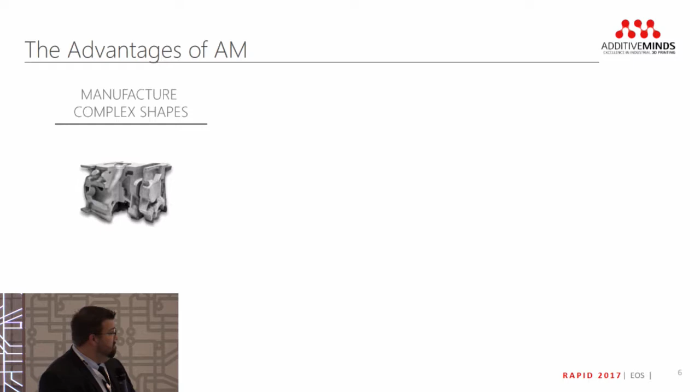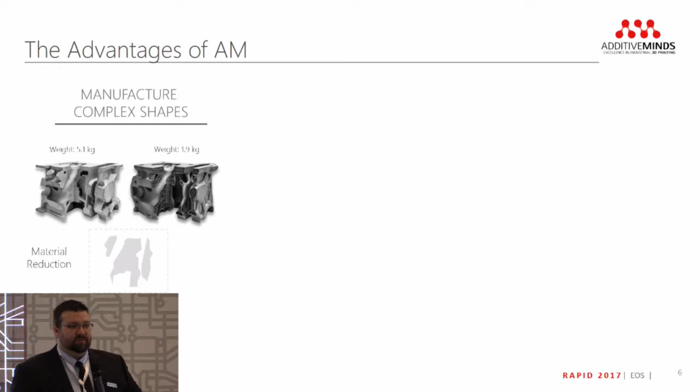So briefly, we'll highlight the advantages of AM. Nowadays most people know what it is, especially if you're at this conference. But additive manufacturing allows you to make or manufacture complex parts, things with intricate geometries that are more difficult to machine. You can actually use more difficult to machine materials, things like titanium and Inconel, things that would run down the tools on your subtractive machines.

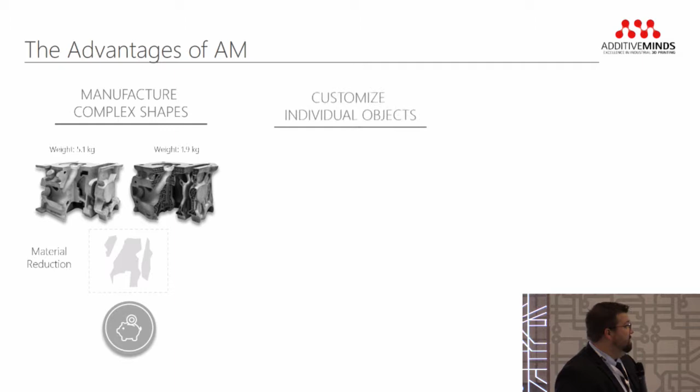Customize individual objects—you can put multiple different types of parts on one machine, build them at the same time. There's no different setup or anything like that. Part A is set up the same way as part B. Put it through your computer system, slice it, print it.

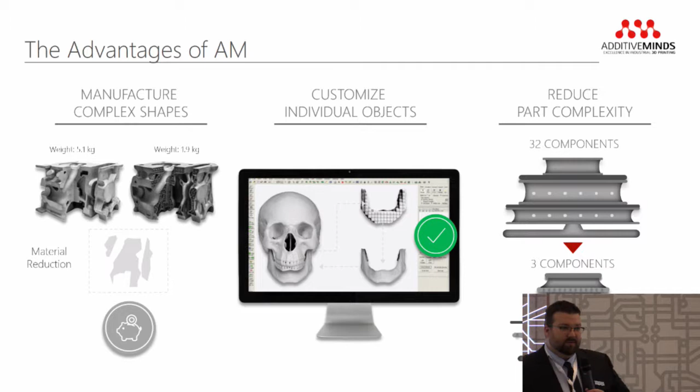And just like the GE fuel nozzle, you can reduce complexity. Things that used to be 30-some parts can now be reduced into 3 components, put together. They're stronger, they tend to work better, they reduce the weight, and are easier to manufacture.

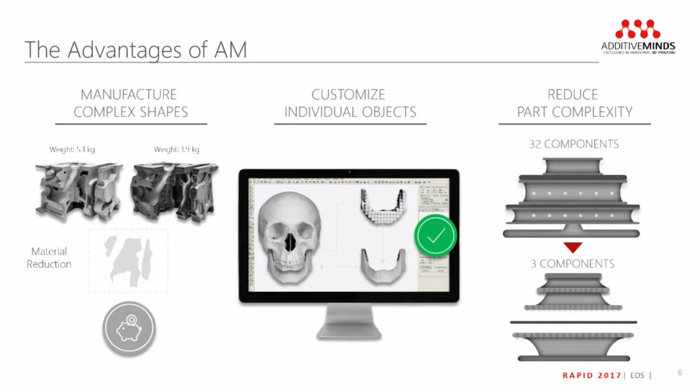So again, why are we all here? Why are we all doing this? This is a typical timeline for a subtractive part. You do some prototyping, maybe you got to set up tooling—that can take months depending on the part complexity. Then you got to remove the material, so cut it away. Post-processing if needed, heat treatment, polishing, all that. And then finally, you have to assemble it into its piece.

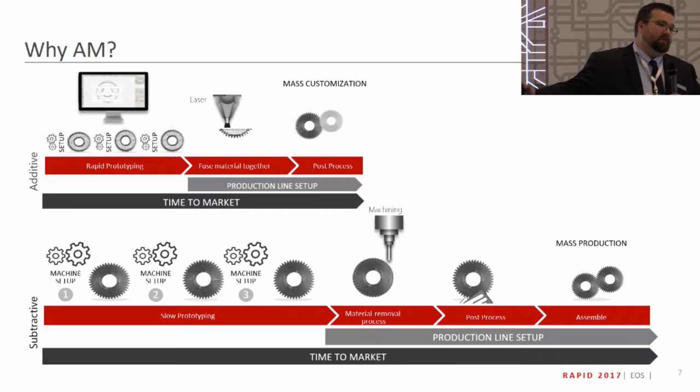Additive is very quick. You can try different designs, different prototypes immediately, and then move right to production. Post-processing can happen pretty much simultaneously. If you have a part that you want to change the design, there's no month-long time to set up tooling to do all that—you can do it right away.

Freeing up your supply chain.

What this is trying to show is that with many of your subtractive equipment, it's a long setup time to do that one specific part. So if you want to change that part, put different numbers on it, make a new through hole or bore, or different surface finish, you have to reset up that entire job. With additive, I can build different parts on the same build. So if I want to do an experiment, a DOE, I can throw all those builds on the same build plate, look at them, figure out which is the best one, move on to production from then.

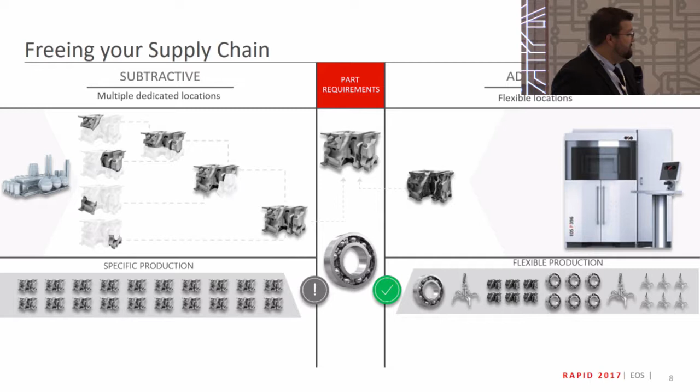As you can see, the one on the left is just one part over and over again, whereas with additive, we can do multiple different parts on the same job, no problem.

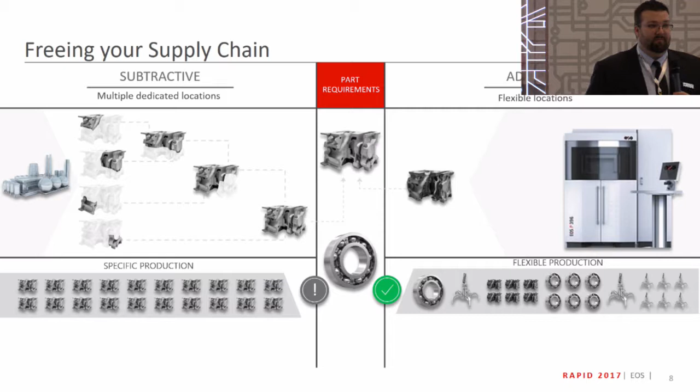So what's this all about? People say they want better technology. AM's all about technology - we can make better parts, better lasers, better machines, better materials - but none of that means anything unless we, as an industry, have a need to drive applications that are going to drive this market forward. So whereas technology is about technology, the transformation is about us, the people, customers. We have to find new ways to use this technology, find new applications that this is good for. And that's kind of where we are trying to come in.

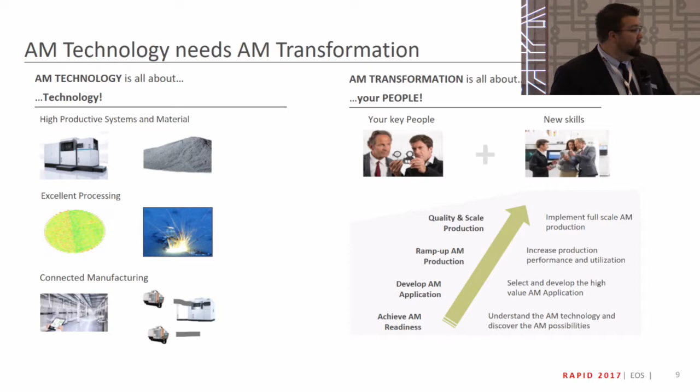What we try to do, the Additive Minds group, it's been going on in Germany for about a year now. We've now moved it on to North America, so there's about 8 or 9 of us here in the US that are part of that group. And we offer things like a customer academy to help train you, if you're a customer of the EOS technology, how to be, we'll call it an expert, but I hate that word, a more advanced user. Things like consulting, we can come help you.

So let's say you have a great idea, but you're not sure how to implement it, we can come help you do that. And then finally, we have innovation centers. So if you have great ideas, but you don't want to build them yourself, we can connect you with partners that can help you build them.

This is all about if you want to have a great company, you need to have great people. So you can have the best machine possible, but if the guy that's running it doesn't know how to run it, it doesn't really matter.

Customer Academy - this is a list of the different kinds of trainings that we offer. Things like, on the bottom there, the innovation with 3D printing is just to get people to learn what 3D printing actually is and how we're using it today. Part screening and selection - what parts are good for AM, what parts aren't.

If you're just CNCing a block, it's not going to be faster for you to do that additively - it's not a great idea. However, if your block has a bunch of conformal cooling tubes in it, maybe that's a good application for additive manufacturing. Design for AM - so taking your existing parts and designing them through the AM process. Parameter editor - that's changing the parameters with the EOS technology. Cost per part optimization, lattice structures, and melt pool monitoring - that's further on the road there.

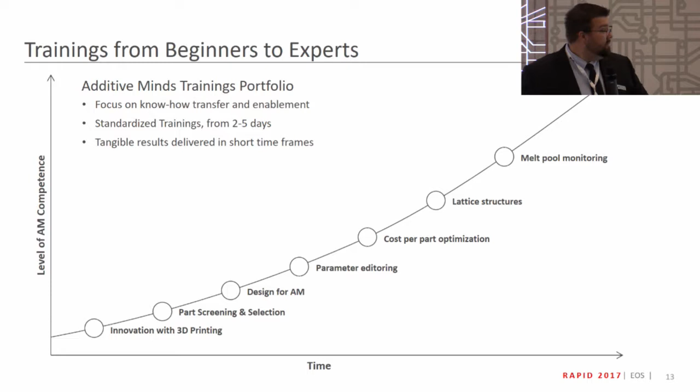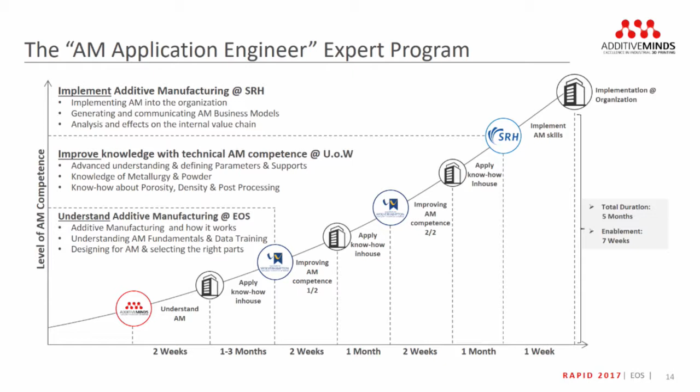The AM Application Engineer Program - this is something that is exclusive in Germany right now. We're working on setting one up here in North America. But we've partnered with the University of Wolverhampton, and basically what we do working with them is we can send one of your engineers to that facility and they just get full immersion additive manufacturing.

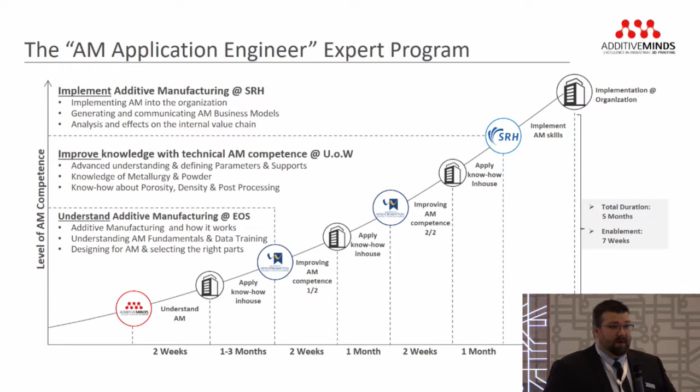It's kind of like learning a foreign language - the best thing to do is drop yourself off somewhere and just learn it. Same thing here, so we try to help you bring up the competence of people running the system so you can run it more effectively. It's a big investment to buy the machine. You want to make sure you're running it right away.

Consulting. Someone like myself or someone from our team can come help you out. You have a great application, but you're not sure how to implement it for additive manufacturing. We'd be happy to help you.

Things like part screening, 360 assessment, so how to set up your lab to be more efficient in additive. Operational qualification, making sure that your operators are qualified to do what they're doing, following the safety steps, making sure materials are handled properly. And additive manufacturing qualification, AMQ.

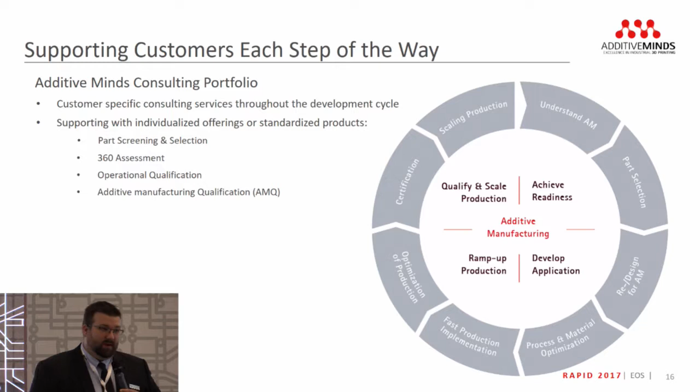This is something we have with Incodema3D out of Ithaca. We basically went in and qualified them to be a service provider, if you will, for other people. So if people come to us saying, can you build us some of these parts? We want to try this out. We help them make those parts.

Innovation centers, these are like our home offices. Places like Novi, Michigan is one, Pflugerville, just outside of Austin, Texas is another. The home base, the mothership, is in Krailling, Germany, just south of Munich.

Those are the sites, and it's not just our sites. We have customer sites that are going to be set up as innovation centers as well. Incodema might be one, and I think Precision ADM is set to be another one. So again, just more places for people to come see the technology, so you don't have to travel all the way to Germany to come see our technology. It's very, very inefficient.

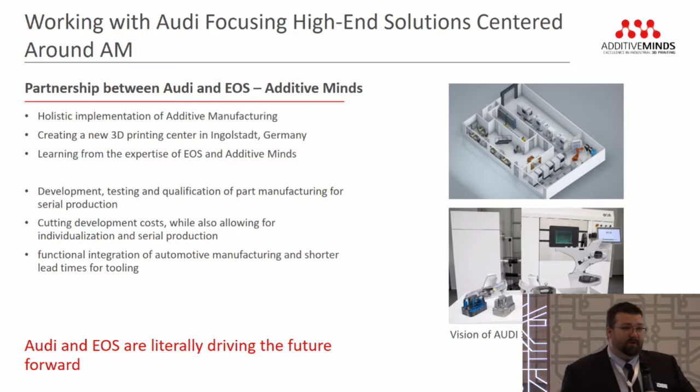So all that sounds great, but does it actually work? Well, sure, we partnered with Audi. They came to us with problems, and we provided solutions. They wanted to adopt additive manufacturing and use it with their production, and we had great success with that.

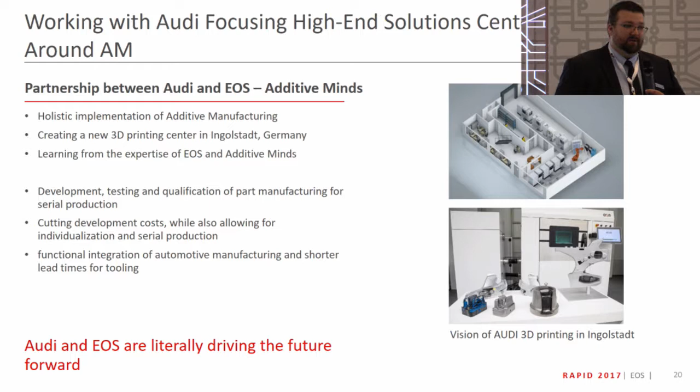We just published a case study, it's all over the internet. Just type in Audi 3D printing or Audi additive manufacturing, and all of that stuff will pop up. It was a great project, good for both of us.

They actually housed a few machines at our site, so we helped them. They've brought in their applications folks to work with us, hand in hand, direct cooperation with EOS. So they pretty much got the best training they could possibly get.

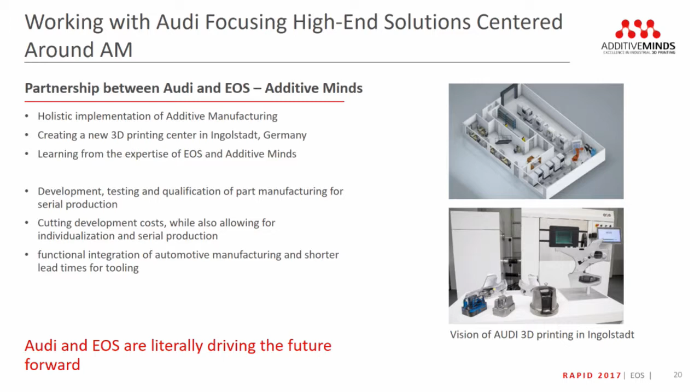Down there, EOS and Audi are literally driving the future forward. That's a direct quote from them: 'With the help of EOS and Additive Minds, the possibilities for additive manufacturing and automotive applications are broadening exponentially.' It's very nice of them to say that.

So the Innovation Center, we talked about this as well. Basically, it allows us to ramp up your competence level faster. Obviously, if you hang out with the experts, you're going to learn something eventually, but if you hang out with the experts at the innovation centers, you get to learn from the best. We learn from our customers as well, it's definitely a two-way street. Without that, you can still do it alone, that's fine, it just might take you a little bit longer, in our opinion.